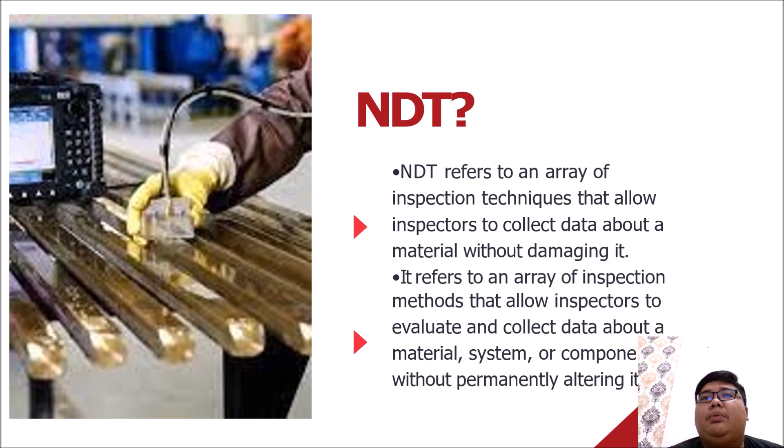My matrix number is 201332972. So I will present about non-destructive test. What is NDT? NDT refers to an array of inspection techniques that allow inspectors to collect data about a material without damaging it. It also refers to an array of inspection methods that allow inspectors to evaluate and collect data about a material, system, or component without permanently altering it.

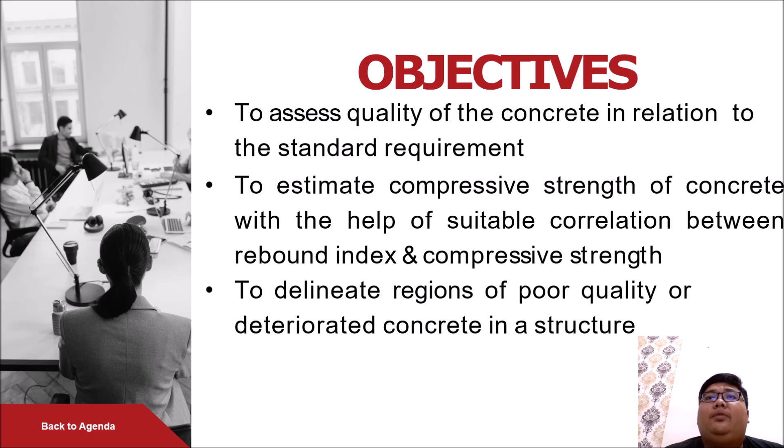So the objective of NDT is to assess the quality of the concrete in relation to the standard requirement, to estimate compressive strength of concrete with the help of suitable correlation between rebound index and compressive strength, and lastly to delineate regions of poor quality or deteriorated concrete in a structure.

So the importance of the NDT test, first is saving, safety and accuracy. For the saving, the most obvious response to this query is that destructive testing is less desirable than non-destructive testing, since the material or object being inspected can withstand the inspection without being injured, saving time, money, and resources.

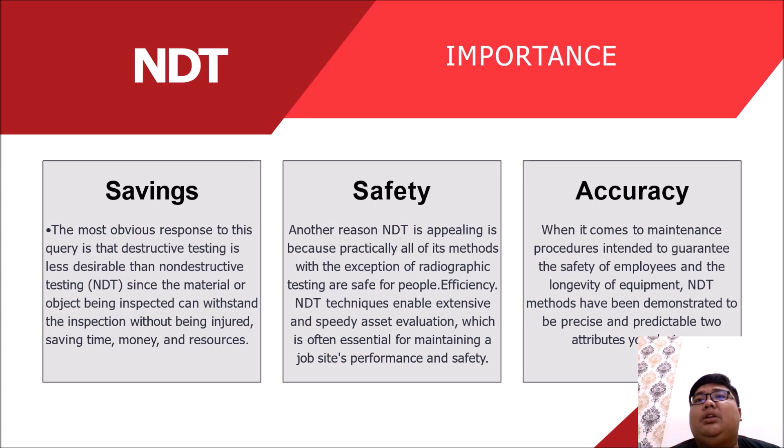For the safety, another reason NDT is appealing is because practically all of its methods, with the exception of radiographic testing, are safe for people. Efficiency: NDT techniques enable extensive and speedy asset evaluation, which is often essential for maintaining a job site's performance and safety. For the accuracy, when it comes to maintenance procedures intended to guarantee the safety of employees and the longevity of equipment, NDT methods have been demonstrated to be precise and predictable.

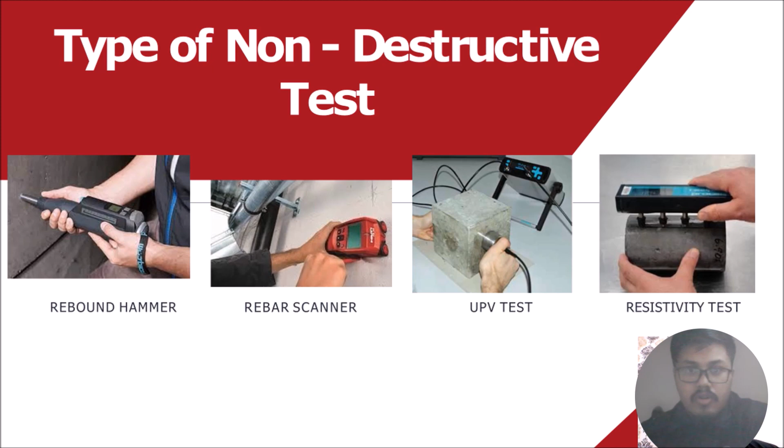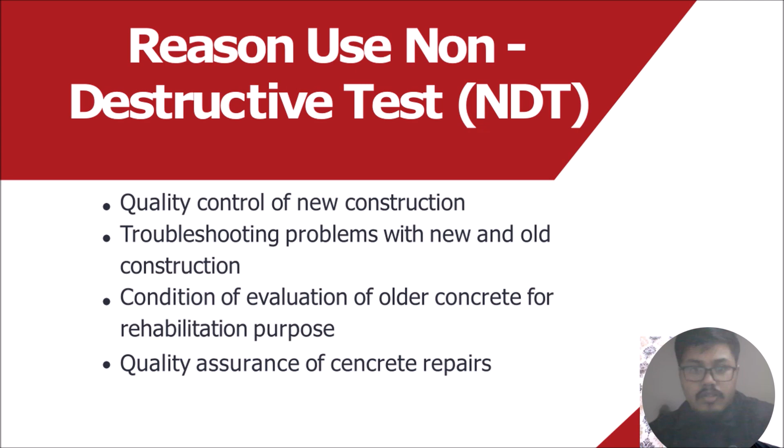There is also equipment that we use, which is the rebar scanner, but that will be for destructive test, I believe, or maybe in another part. But for NDT, these are the four equipment that we usually use. So the reason for using NDT test is to check the quality control of new construction, troubleshooting with the new and old construction, checking the condition and evaluating older concrete for rehabilitation purposes, and also checking the quality assurance of concrete repairs.

So to conclude, for part A, non-destructive test is a valuable technique used by many industries to evaluate the properties of a material, component, structure, or system without causing any damage. There are various types of NDT such as visual inspection, radiography, ultrasonic testing, magnetic particle testing, and penetrant testing. Each type has its own advantage depending on the application. So to conclude, NDT is a test where we test the quality and also the condition of the concrete without ruining the surface or the internal of the concrete.

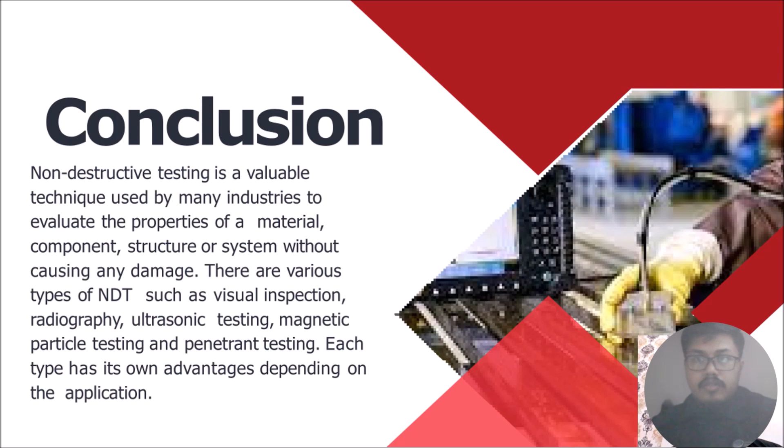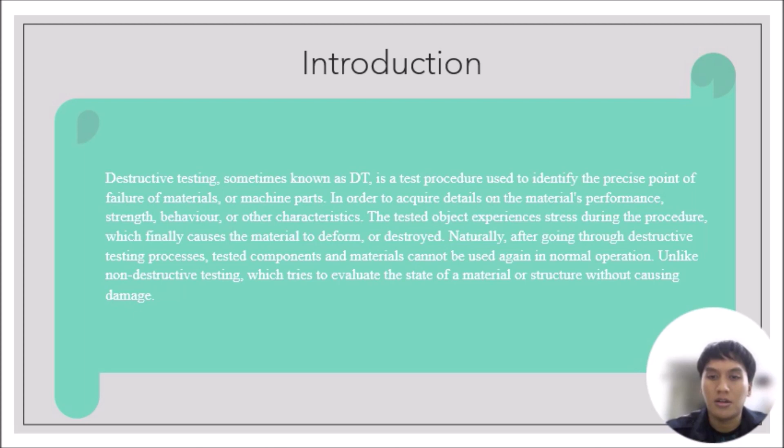As for my part, I'm going to present about the destructive test. So for the introduction, destructive testing, known as DT, is a test or procedure used to identify the precise point of failure of materials and machine parts in order to acquire details on the material's performance, strength, behavior, or characteristic. The test object experiences stress during the procedure, which finally causes the material to deform or be destroyed. Naturally, after going through destructive testing processes, the tested component and material cannot be used again in normal operation, unlike non-destructive testing, which tries to evaluate the state of a material or structure without causing damage.

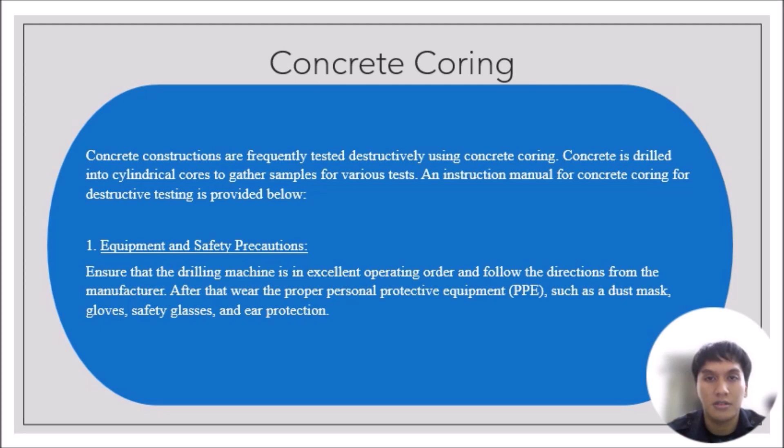For the concrete coring, concrete is drilled into cylindrical cores, various samples for various tests. An instruction manual for concrete coring for destructive testing is provided below. First, equipment and safety precautions. Ensure the drilling machine is in excellent operating order and follow the directions from the manufacturer. After that, wear PPE such as dust mask, gloves, safety glasses, and ear protection. Second, select the core sampling location. Choose the precise places on the concrete structure from which to take core samples, such as beam and column. Then consider elements like accessibility, representative sampling, and structural integrity.

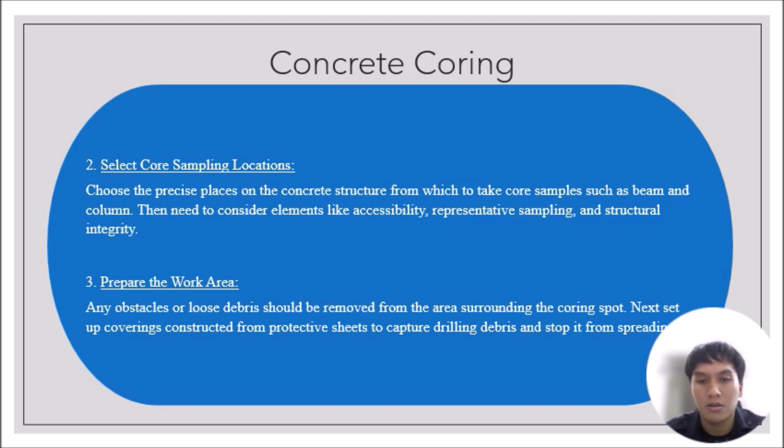Third, prepare the work area. Any obstacle or loose debris should be removed from the area surrounding the coring spot. Then set coverings constructed from protective sheets to capture drilling debris and stop it from spreading. Fourth, begin coring. Put the core drilling device at the selected coring location, launch the drilling device, then gradually drop the core bit into the concrete surface. Start the coring procedure by applying consistent downward pressure and turning the core bit. Fifth, extract the core, continuing to drill until the ideal core depth is attained. Depending on the testing needs, core depths can range from 2 to 8 inches, which is 5 to 20 cm in diameter.